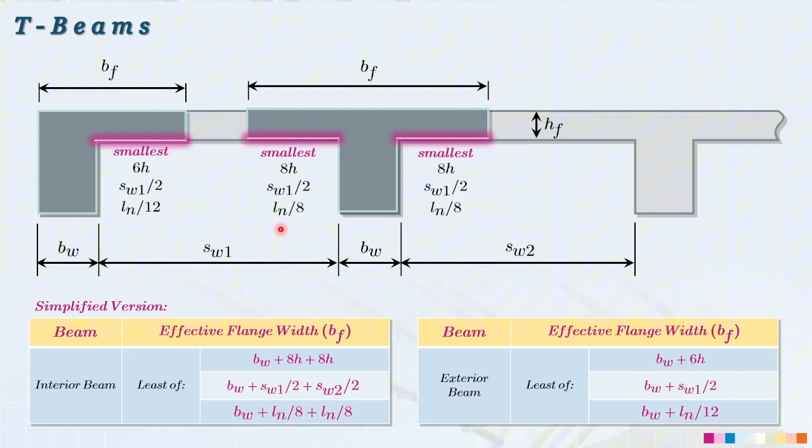Ngayon, let's further emphasize kung anong ibig sabihin ng ating L sub n dito. So dito class, kapag sinabi nating L sub n or the clear span of the length of the beam, so ito po yung i-consider natin.

So kapag sinabi kong clear span, ibig sabihin po nun class yung interior distance lang po, no? So we will not consider here center to center or yung dulo to dulo na span natin. Yung nasa interior lang po. Kaya po siya tinawag na clear span.

Okay? So now, naintindihan na po natin kung paano natin mag-qualify kung ano yung magiging effective flange width po natin. Ngayon, we will now proceed on the computation of the moment capacity ng mga T-beams natin.

Ang kinagandaan kasi dito sa topic na ito, since this is a subpart of non-rectangular beams, magkakaroon lang tayo ng dalawang cases when we are having a T-beam.

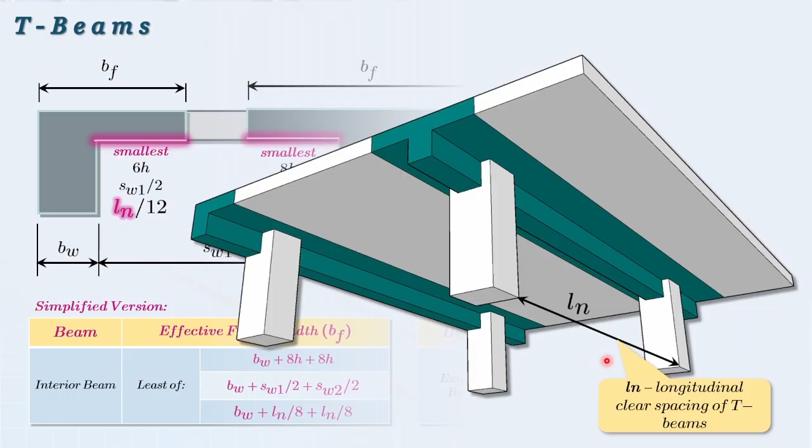So first case natin dito is when the length of the rectangular stress block is less than the thickness of the slab.

So ibig sabihin lang po nun, yung value ng ating a ay hindi pa siya lalagpas dito sa ating offset dimension, which is the thickness of the slab.

Actually, nagagawa na din natin to from the previous sample problems po natin. Okay? But in this case, we will further elaborate, no? So that magkakaroon tayo dito ng mas systematized na solution when it comes sa analysis natin.

So first case natin, ibig sabihin lang po nun, hindi po lalagpas yung value ng a sa thickness ng ating slab. So yung magiging treatment natin sa pag-compute ng nominal moment capacity is just simply the typical formula na ginagamit natin sa rectangular beam.

So yung moment arm natin dito, this is just simply the effective depth minus a over 2, or the half of the length of the rectangular stress block natin. So yan yung makukuha natin ditong moment arm for this one. Okay, so yan yung ating first case.

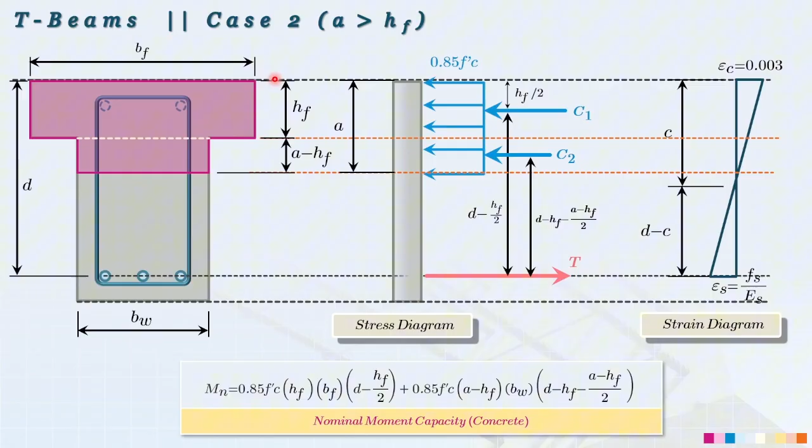No? So yung second case natin dito, which is this one. Yung second case naman natin, kapag yung value ng a is now greater than the thickness of the slab. Okay? Ibig sabihin lang po niyan, class,

lalo na sa ating area of compression block, you will consider here two rectangles. So yung una, yung first rectangle natin, yung nasa itaas, etong nasa slab na ito. Pangalawa ay yung nasa baba.

Okay? So ibig sabihin lang po niyan, para makuha mo yung nominal moment capacity natin, dalawang moment po yung kailangan ninyong idagdag. So yung una, etong nasa itaas, pangalawa naman ay yung nasa baba. You need to add them all using this derived formula.

So yung mga pinapakita ko na sa inyo dito sa formula na ito, mga derived formulas na po yan. Okay? That you can use already kapag nakakita na kayo ng isang T-beam. Okay?

So, ibig sabihin lang po nito, class, yung first term dito sa nominal moment capacity natin, this is the bending moment or the nominal moment strength dito sa ating flange. While yung second term natin, which is this one, ito naman ay para sa web.

Kasi nga, alam naman natin na yung area of compression is irregular shape na po siya. So, para matukoy natin yung kanyang bending moment, we can separate it into two pieces. So, palagi naman dalawang piraso yan.

So, yung una, yung nasa flange, yung pangalawa naman ay nasa web. Okay? So, of course, add nyo lang sila para makuha na natin dito yung total moment capacity, if the case is the value of a is greater than the thickness of the slab or the h sub f.